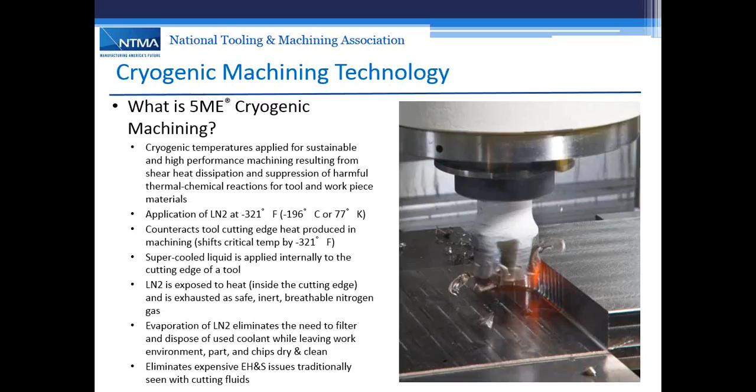Okay, we're going to talk about the overview of what the system looks like on a machine tool. There are 6 main components: the source, the feed system, the subcooler, rotary coupling and lance, the tooling, and then a controller. Next slide should show us some further detail on each component here.

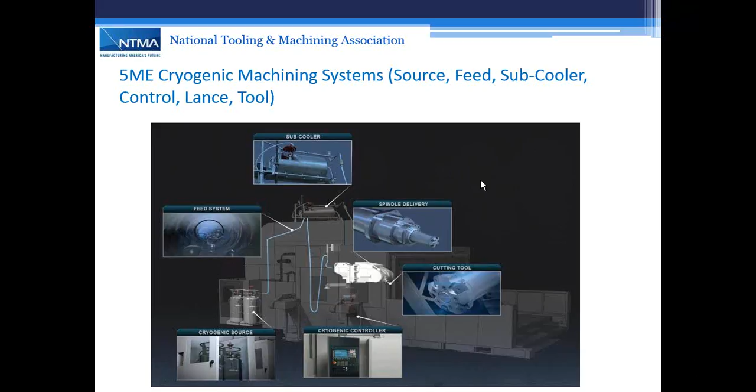Talking about the source system, there are two ways to run a source. One is if you're in production, or already have a liquid nitrogen infrastructure with a large bulk storage tank outside the facility, then it's a simple matter of plumbing a drop down to the machine tool, or multiple machines, like the diagram shows in the upper right.

If it's a single machine or first machine install for validation purposes or R&D testing, then there is what's called a dewar system, which is basically just a large thermos. We normally supply a 300-liter dewar for our system, but that can change, smaller or larger, as required. The liquid nitrogen sits in there self-pressurizing.

As soon as liquid nitrogen heats up a little bit to ambient temperatures, it creates nitrogen gas. It boils at minus 321 degrees, of course. That expansion from the boiling gas creates the pressure to move the liquid nitrogen through the system. We're talking about very low pressures. Most transportation dewars are 22 psi. The systems we build are anywhere between 30 to, at maximum on very large machine tools, up to about 70 psi. Again, very low pressures.

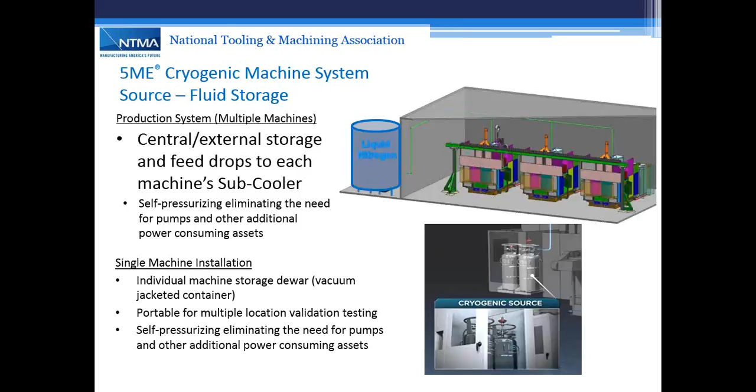The feed system, like almost all the components in the cryogenic system, is made out of stainless steel. Stainless steel is one of those materials that does not embrittle at cryogenic temperatures, so it's a very safe metal to use under these temperatures.

And it's all vacuum jacketed. Flexible lines, rigid lines, the dewars, even the subcooler has an inner vessel or inner tube in the lines, surrounded by an external stainless steel tube, and then we extract a vacuum between the two tubes with nothing between them. There is nothing for the cold energy to propagate to the outside. So inside the tubing you'll have minus 321 degree liquid nitrogen, and the outside you can actually hold on to at ambient room temperature.

What the subcooler does, it normally sits at the top of the machine tool. It takes the pressurized liquid nitrogen, and as we know from physics class, any liquid under pressure will gain heat. What we do is take that heat away by running pressurized LN2 through a zero pressure liquid bath of LN2. That eliminates the heat built up by pressure, but more importantly, we want 100% liquid, eliminating all the gas bubbles that would normally congregate into what's called segmented flow in cryogenic flow.

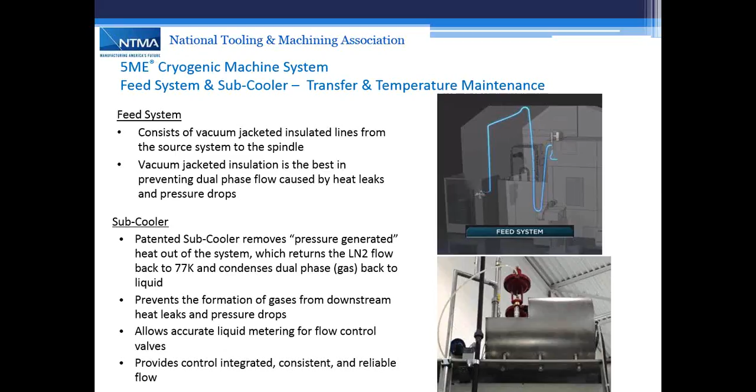Next component is the controller. The upper right shows the control system that comes with our retrofit kit. This will control the flow requirements, anywhere from 7 to 100% flow.

It is integrated with a number of sensors within the system, and also integrated with an e-stop. If you look at the lower picture, this was one machine builder's integration panel that they fully integrated, so it's absolutely transparent to the operation of the machine tool. Again, the e-stop on the machine will safely shut down the cryogenic system as well.

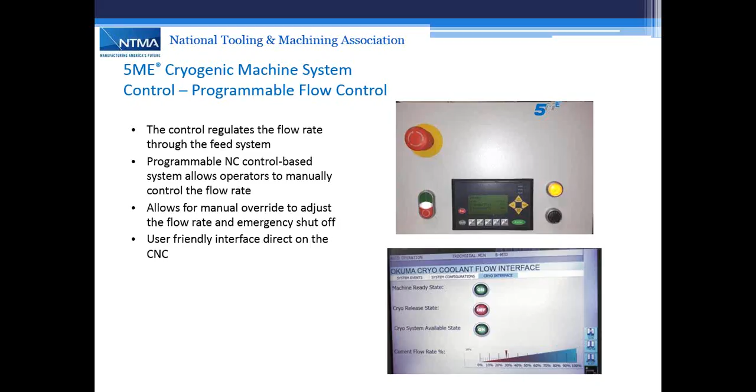The flow rates are programmable. They can be manually set, or programmed in as M and G codes. There are some other additional methods we're working on, for example using RFID chips to pre-program right onto the tool during the tool setting process.

The lance and rotary coupling. The rotary coupling sits at the back of the spindle, which is attached to a lance, and the lance is a very critical component. It is a vacuum jacketed system, with an inner tube that carries the liquid nitrogen, and then a tube around that with the vacuum extraction like we talked about earlier.

Again, it does not allow the cold to migrate to the drawbar, to the spindle shaft, or to the bearings. We've had a lot of systematic inspections of thermal migration on spindles, and some of our equipment has thermal sensors on the front and rear bearings, with numbers typically run for a very long period of time. We're looking at anywhere from 1 to 3 degree Celsius temperature change on the front bearings, which is really insignificant for a precision spindle.

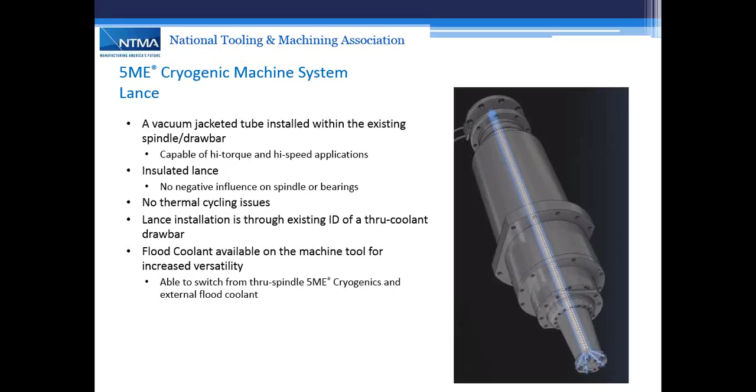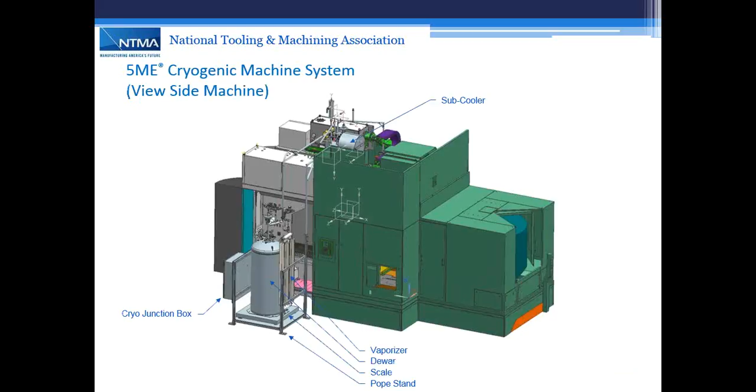This is what the systems look like sitting on a 600 or 630 size horizontal machine tool. If you go to the next slide, it'll show the system without the machine.

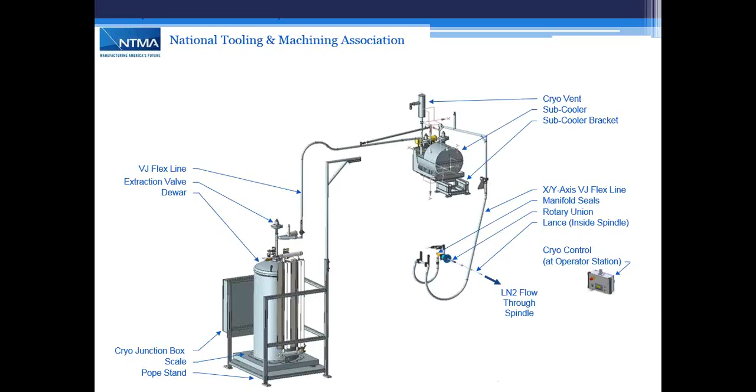Okay, the cutting tool technology. This is the other half of the importance of the 5ME technology. The first one, obviously, is a sophisticated machine tool friendly kit that would allow the delivery of liquid nitrogen from a source, any source, to the spindle.

Rake face heat is not only the heat coming from the shear plane on the back of the chip, but also the huge frictional demand on the rake face of the tool. And of course, the shear plane heat must be there. If you take the shear plane heat away, you'll end up crushing most tools. That's why you can't machine high temp alloys at extreme low speeds. For example, Inconel, if you don't pre-soften the workpiece in the shear plane, it will not cut, it will not shear. Now, most people conventionally would throw coolant on this, and again, the coolant is on the other side of the chip.

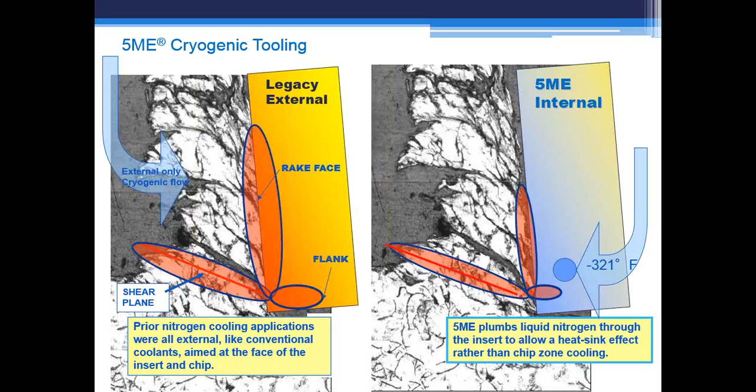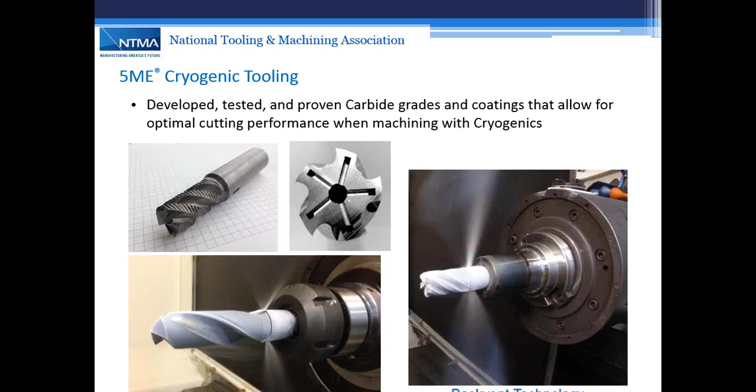So we're putting the liquid nitrogen as close as we can - these are old photos, we're actually a lot closer today. We're also doing that methodology with the drills, as you can see in the photograph on the bottom. Bringing the liquid nitrogen to the very front, following it back on the lip and spiral margins of the tool, and exhausting it away from the workpiece. Again, not to make the workpiece cold, because there's a lot of materials that's not productive.

We've done high feed mills, indexable drills, indexable boring tools, solid carbide end mills, drills, thread mills, and reamers. Interfaces include Cat 40, 50, 60, and HSK 63, 100, and 125.

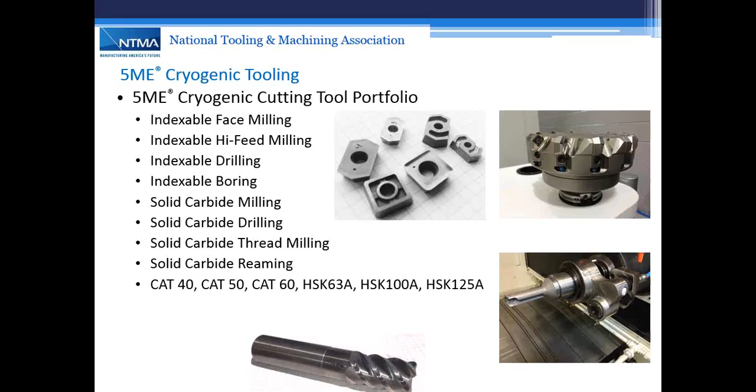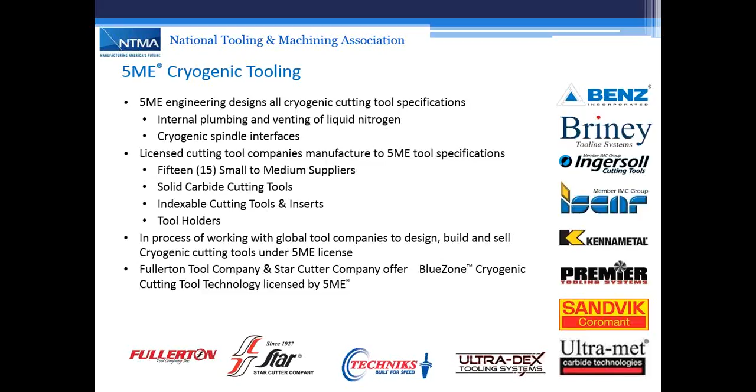Okay, now we want to talk about the benefits. There are 3 main categories when you're making a chip, making a part, manufacturing something: it's got to be sustainable, it's got to perform, and it has to have good part quality. In all of these 3 areas, there's significant advantages with the cryogenic machining process.

In the sustainability area, the carbon footprint is reduced because you can produce at higher metal removal rates, faster cycle times, and therefore possibly reduce the number of machines required. There's no fossil oils - the electrical motors that move coolants around all disappear. All the contamination associated with conventional machining also disappears.

From a performance perspective, there's metal removal rate increases. There was one very significant landmark study we did with Lockheed Martin on aerostructure components, where we were able to reduce their piece part cost up to 30% from billet to flight part. It was announced by Lockheed management that there's a possible $300 to $500 million in projected savings on the F-35 program with these types of cycle times and cryogenic machining.

It will also allow efficient machining of emerging lightweight materials - when you start looking at metal matrix and ceramic matrix composites, those are either very hard to machine, high temperature alloys, or extremely abrasive materials. Again, by keeping the heat out of the cutting tool, you're able to reduce the heat that comes with the high abrasion and heat resistance of these materials.

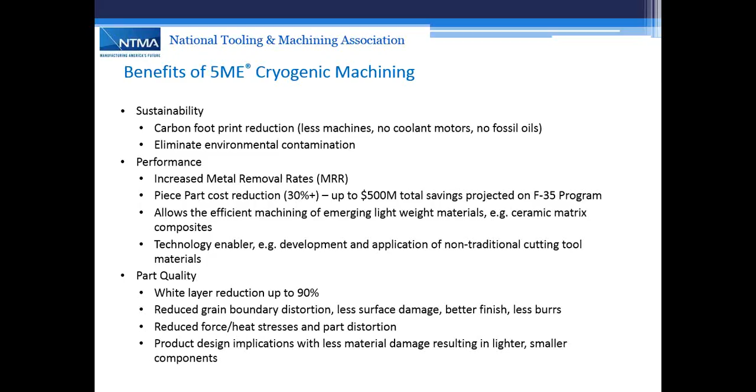There's also reduced heat stress and part distortion. In a lot of airframe components, there's a lot of flipping going on - you have to rough machine one side, rough the other, semi-finish, flip it over, semi-finish, finish, etc. A lot of those flips could possibly be reduced because of the reduction in distortion of components with cryogenic machining. It also leaves room for possible part size reductions or reduction in safety factors, because we're not destroying the surface integrity of the workpiece as we manufacture it. So there may be some opportunities in the future for less safety margin and lighter components.

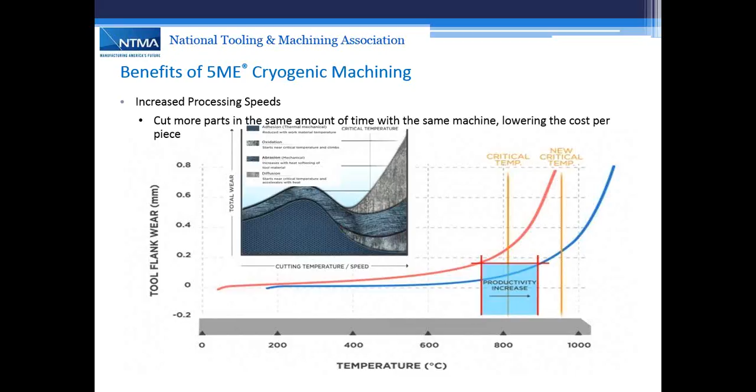So again, if we move that critical temperature to the right 20 to 30%, then those two wear mechanisms do not kick in, and therefore you extend your tool life, or are able to machine faster before those tool wear mechanisms kick in. Okay, next slide.

So again, the benefits of cryogenic machining: you're running up to 5 times faster in some materials like compacted graphite iron with equivalent tool life. You increase tool life — in some cases, we've had finished turning in titanium where we've had up to a 35 to 50% tool life increase with double speed.

No coolants, pumps, filters, improved surface integrity. From a cleaner perspective, there's no dirty coolants. The chips are dry — they don't stick to the sides of the machines anymore. Slip hazards on large machine tools are eliminated. If the operator needs to walk onto a large fixture to tighten up a large workpiece, there's no need to wash chips. So all those contaminants are basically removed from the system.

From a greener perspective, lower energy consumption because you can machine a part, let's say, in half the time. Therefore, the machine tool only has to run half the amount of time per part. It reduces the carbon footprint by elimination of pump motors and filtration motors — a green work environment. You eliminate all the oils. It's the absolutely most sustainable manufacturing method there is, even more sustainable than dry machining, because in dry machining you're going to take twice as long, if not longer, to machine that component. So it is absolutely the most sustainable method of manufacturing today.

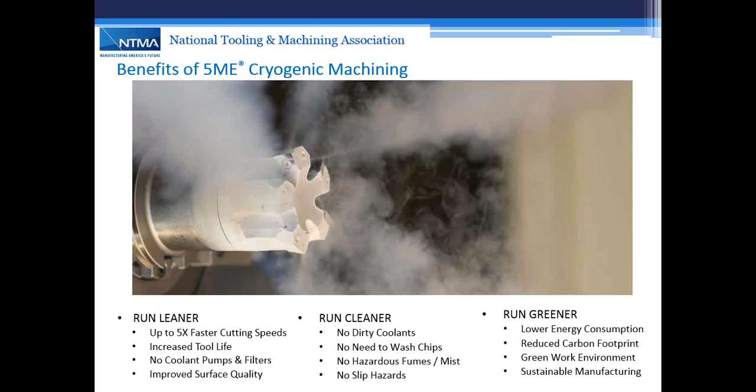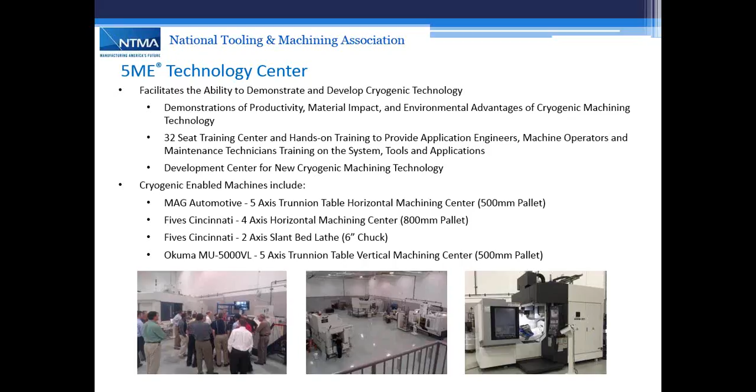Okay, one or two case studies. Most of the testing and R&D development work is done at our technology center in Warren, Michigan. We have a number of cryogenically enabled machine tools on the floor, and this is where we do demonstrations for customer part components, and almost all our tool development is done here. We have 5-axis machine tools. We have a Cincinnati 2-axis lathe where we do all our tool life testing for turning. And there's vertical and horizontal machine tools available here, so almost any component can be machined on these 4 machine tools here.

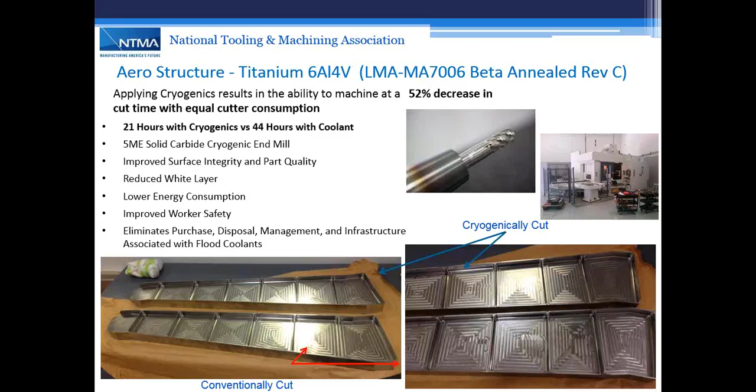Obviously no oils, et cetera, for the environmental issues with the operator as well. Okay, next slide. With that surface integrity improvements we talked about, we've been able to get certification from Lockheed Aeronautics, a North American and a European commercial aircraft OEM, an aero engine OEM, and an aero engine tier one supplier here in North America as well.

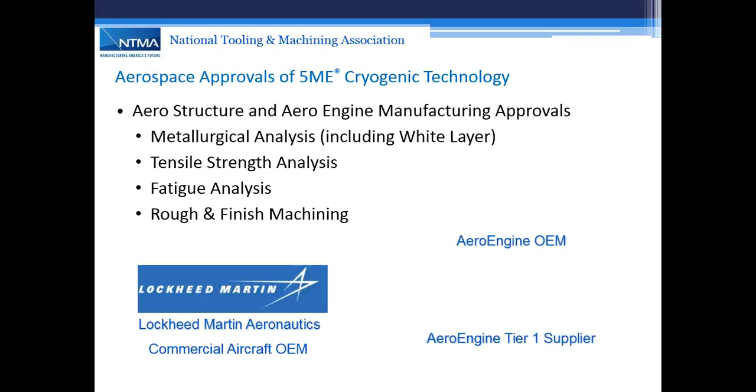Next slide. Just a quick shot on different materials. I mentioned compacted graphite iron earlier. That particular material, we saw a 5 times speed increase to conventional with equivalent tool life. Diesel irons, we saw 3 times with a 40% tool life increase. So what that tells me is if we were looking for equivalent tool life, that should be maybe 4 times to get rid of that extra 40% of tool life.

6-4 titanium in turning, this is one where we've seen a more than 2 times increase in metal removal rates with equivalent tool life, and in finish turning is where we've seen up to 32 times to 50 times tool life increase.

In 6-4 milling, 2 times metal removal rate increase with equivalent tool life. Inconel 625, a 30% increase with twice the tool life. Hardened steels, this was a 4340, 40 Rockwell material, 30 to 60% metal removal rate increase at equivalent tool life. Stainless steels, anywhere from 17 to 30% metal removal rate increases at equivalent tool life. Carbon composites, couldn't run any faster because the machines are already running max RPMs, but we saw 40% improvement in diamond vein tooling, which is extremely expensive, so there's a significant benefit even on carbon composite materials.

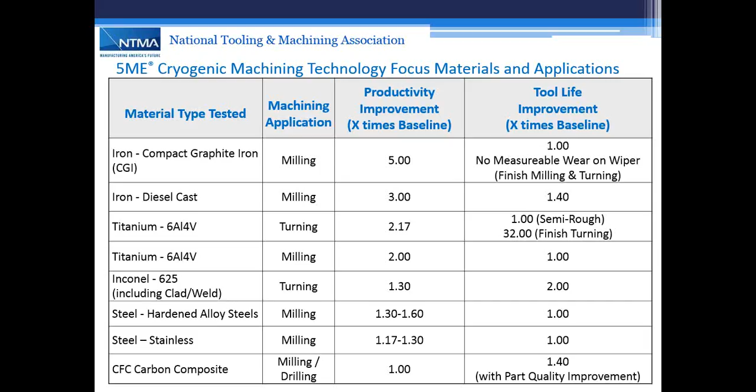Next slide. Okay, I'm going to turn this over to Lee from Okuma so he can share his experiences with the cryogenics so far. Thank you.

Thanks, George. Hello everyone, this is Lee Johnson from Okuma America. So Okuma has been working with 5ME now for around 2 years, I believe. I personally have been working with them on Okuma machines for a little over a year now. We've installed the cryo system on both horizontal machining centers, as you see in the picture here.

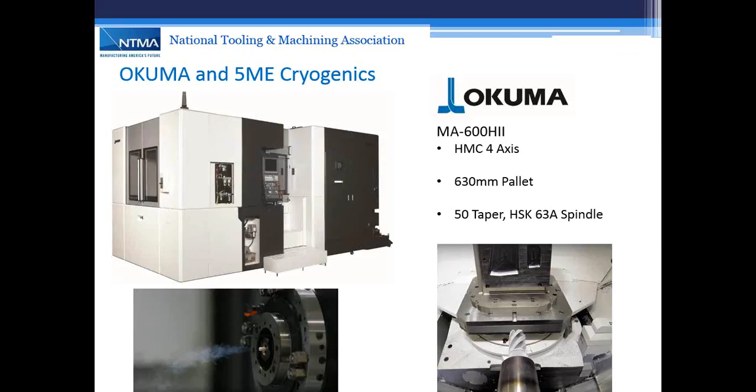This particular machine was at their facility, is now at Lockheed, I believe. And then, the slides to change, there we go. We've also installed the system on our 5,000 and 8,000 size 5-axis vertical machining centers. The MU5000 is at the 5ME facility for testing, and we have 2 of the 8,000 machines here in Charlotte fit with the cryogenics system.

And it's been working very well for us. We've tested it on a variety of parts, from airframe type parts to blisks or bladed rotors. We actually showed the blisk you see in the bottom right-hand corner at IMTS this year, where it got a lot of attention. A lot of people interested in cryogenic technology, especially on the aerospace side, where they do a lot of billet titanium work.

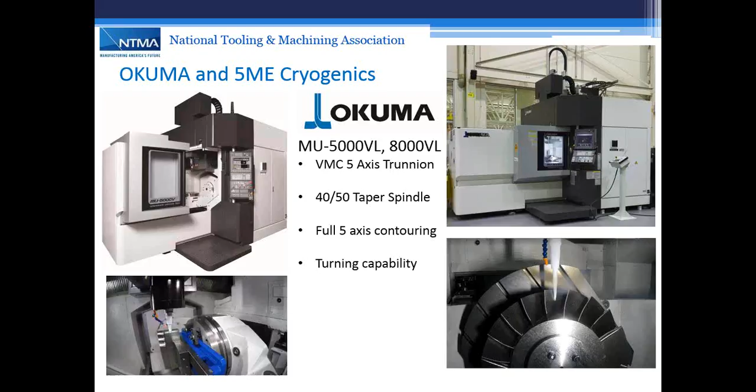The advantages we've seen from the cryogenic system is increase in cutting speed or an increase in tool life, or it's basically a sliding scale whereby you can pick where you want to be on that scale.

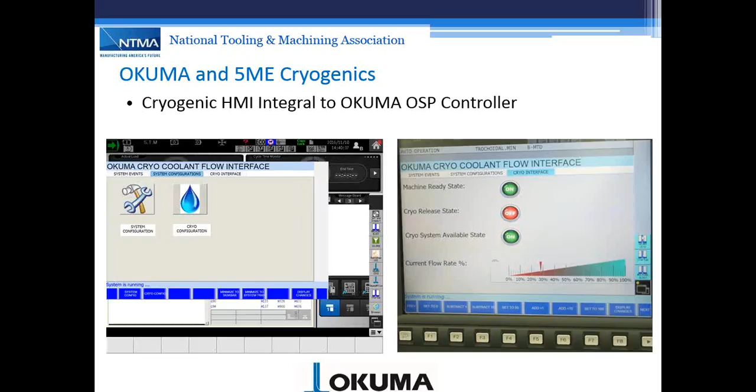One nice feature we have on the Okuma control is our open architecture that lets us develop applications for anything. In this case, we developed the Okuma cryo coolant flow application, whereby in real time the control is in communication with the 5ME cryo system, communicating both ways with fault information but also flow rate information. So we can change the flow rate on the fly from either their control panel or from the Okuma side, be it with an M or G code in the program or by using the app itself just to manually override what the program has requested.

As I said, we did the bladed rotor at IMTS and it got a lot of attention. Some of the questions people would ask are, what about the effects of the liquid nitrogen on the machine? One way we monitor that and deal with changes in temperature is we have temperature sensors embedded throughout the machine, both in the spindle and in the frame and in the axes, that allow us to measure those temperatures in real time and compensate for any thermal expansion or shrinkage in real time.

As George was saying, by monitoring the spindle bearing temperatures, which is people's biggest concern, the impact on the spindle, we only see maybe a 1 to 3 degrees Celsius change over 8 or 10 hours at runtime. So very low impact on the machine, which is always a good thing.

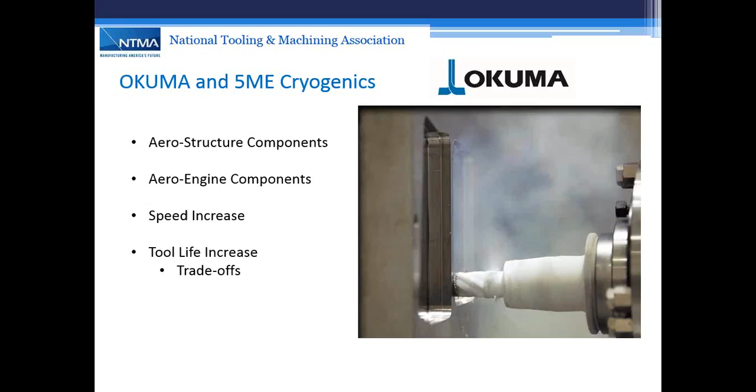This is Mike Kirscher from Mazak Corporation, and we've had similar experiences with 5ME and the cryogenic system. At IMTS, we applied the 5ME system to our Variaxis i-800T machine. This is a vertical spindle machine with a tilt trunnion table underneath it. This particular machine also had turning capability, so very similar to what Okuma did.

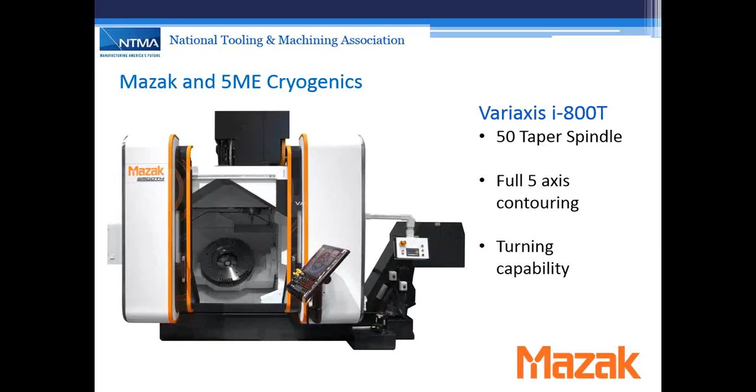Here we have the control panel on our machine, separate from the CNC control. But we had nice luck with it.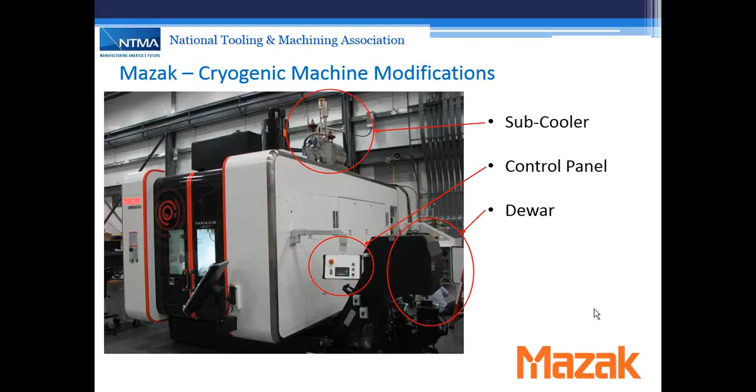One thing we did add to the machine here at Mazak was a heater to the outside of the control, or the machine cabinet. The reason for doing this is that we were able to have the air inside the machine change the dew point so that we could view the cryogenic machining a little more easily.

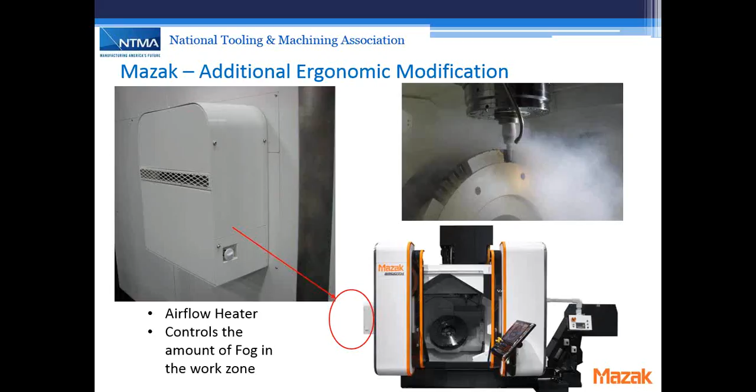As you can see in the photo on the upper right, we can generate a fair amount of fog, and this is all relative to the humidity of the day and the dew point and that type of thing. By having a small external heater that drew warmer air into the cabinet, we could get a little bit better visibility. There's no need for this other than for visibility, but it was beneficial at IMTS.

In general, our experience was machining titanium. It was a 6Al-4V material. We were machining a blisk type profile. The blisk density was pretty high to where we had to use some fairly small cutters in the roughing operations and small cutters in the finishing operations.

In the roughing, we did experience a little bit of some issues, but 5ME has been working on some improvements to those cutting tools to help with that. On the finishing operations, we were also seeing a similar kind of 2-to-1 tool life advantage for machining the material over conventional tools.

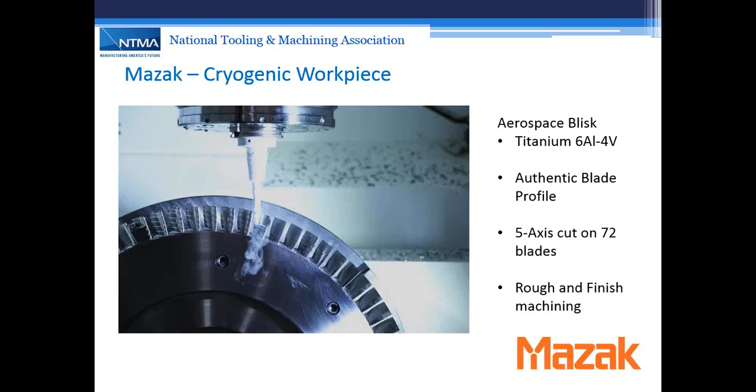So with that, we can open it up to some questions from the group, and we'll go from there.